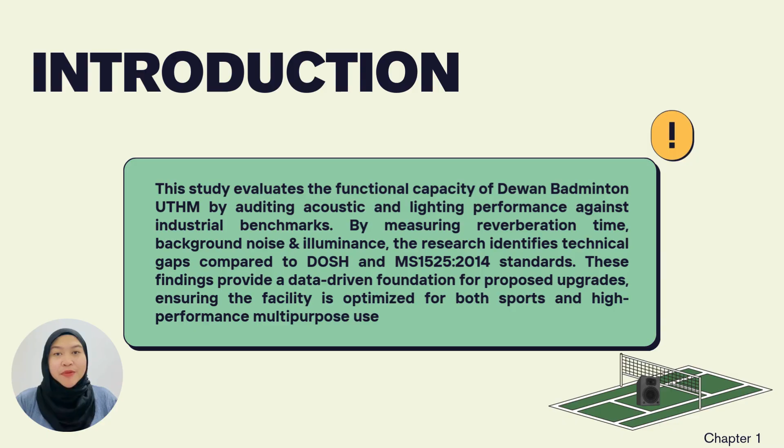We conducted the assessment at Dewan 1 Badminton UTHM. We audited the hall's functional capacity by measuring three key factors: reverberation time, background noise, and illuminance level. By comparing our data against DOSH and MS 1525 industrial standards, we identified critical gaps that limit the hall's versatility. Based on this measurement, we have proposed technical upgrades to improve sound clarity and visual comfort, transforming the space into a high-standard multipurpose venue.

The objective of this project is to measure the current acoustic performance, reverberation time, background noise, and lighting levels within Dewan 1 Badminton UTHM. Second is to assess the compliance of these measurements with established regulations, specifically the DOSH standard for noise and MS 1525-2014 for lighting. The third is to propose technical improvements and mitigation strategies based on the collected data to enhance the hall's suitability for multi-purpose use.

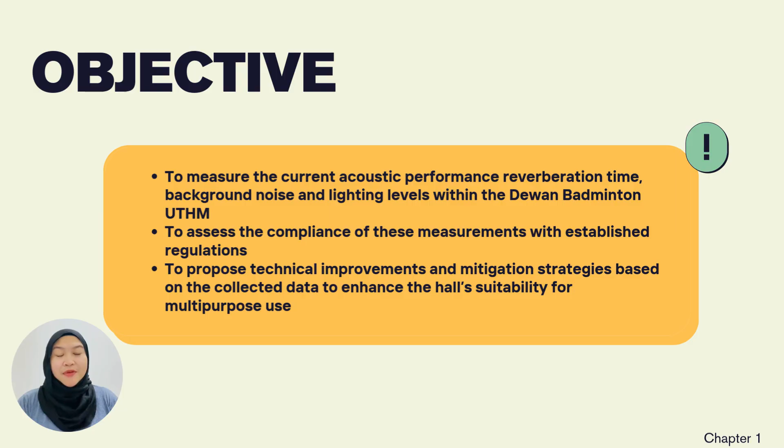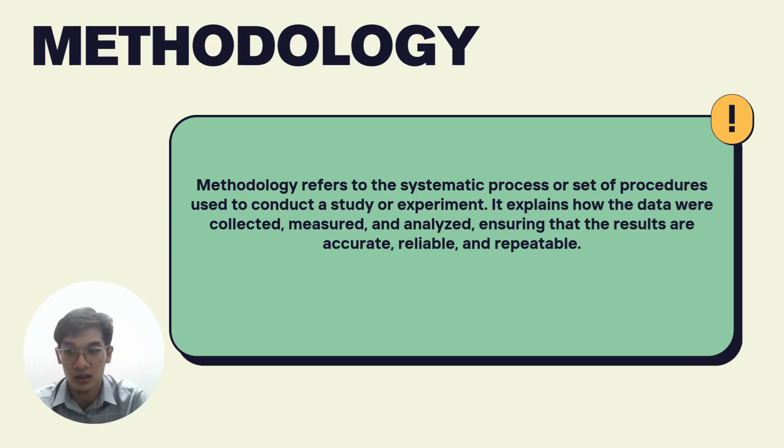Methodology refers to a systematic process where procedures are used to conduct a study or experiment. In this case, we measure reverberation time, background noise, and lighting.

For the reverberation time measurement, firstly, the sound source was placed at the selected location in the hall to ensure even sound distribution throughout the space. A total of 45 points were set up using a grid layout with 5 meter horizontal spacing and 2.4 meter vertical spacing to cover the entire hall.

At each point, the sound level meter microphone was mounted on a tripod at a height of 1.2 meters above the ground, representing the ear height of a seated occupant. To reduce the effect of direct sound, a minimum distance of 1.5 meters was maintained between the sound source and the microphone. All measurement points were also positioned at least 1 meter away from walls and reflective surfaces to minimize boundary reflection influence and ensure the decay measurement represents the room.

The measurement begins when the sound source generated broadband noise until a stable sound field was achieved inside the hall. Once the sound field became steady, the sound source was switched off, and the sound level meter then recorded the sound decay. The reverberation time was obtained by measuring the time taken for the sound level to decrease by 60 decibels, known as RT60.

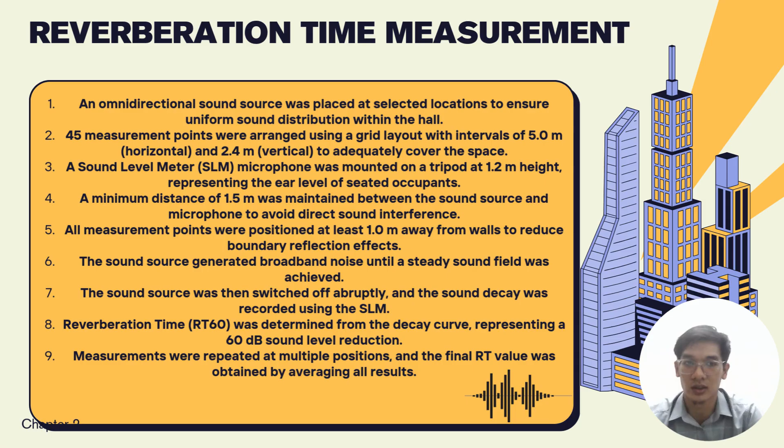To ensure a reliable result, measurements were repeated at different source and receiver positions. The final reverberation time for each frequency band was calculated by averaging all the measured values.

The second measurement is background noise measurement. Before the background noise measurement begins, all intentional sound sources, including the PA system and sports activities, were turned off to measure only the natural ambient source. The mechanical ventilation system, which consists of 9 industrial fans, remained operating to represent normal hall conditions.

The sound level meter was placed on a tripod at a height of 1.2 meters, same as the reverberation time measurement, at several locations in the hall.

Background noise was recorded over a fixed time period at each location and repeated at different times to account for noise fluctuation. The measured data were analyzed using octave band analysis and used to generate a noise rating curve, which was compared with standard criteria for multipurpose halls. To ensure reliability, measurements were taken at multiple locations, and the final background noise level was obtained by averaging all results.

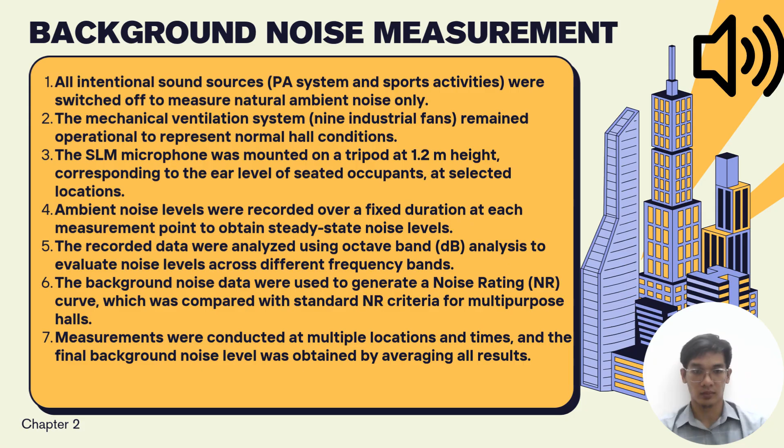For the lighting measurement, all measurements were conducted using a lux meter with a grid layout to ensure uniform coverage across the hall.

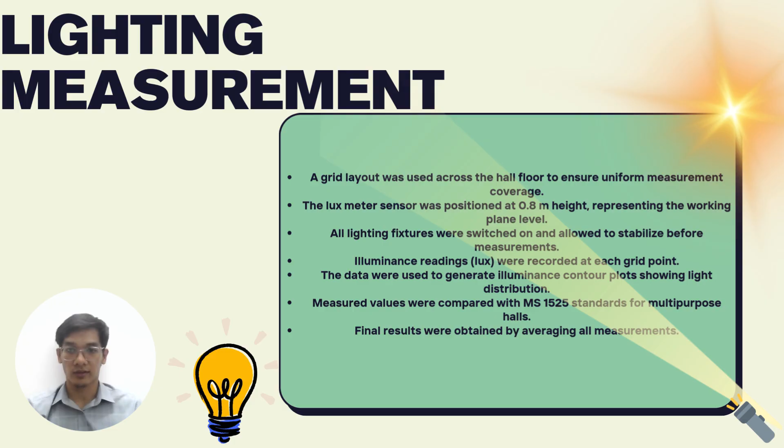The sensor of the lux meter was placed at 0.8 meter above the ground, representing a working plane height, and all the lighting fixtures were switched on and allowed to stabilize before readings were taken. The measured values were recorded at each grid point and used to generate illuminance contour plots to assess light distribution and uniformity. The results were compared with Malaysian standard MS1525, a standard for multipurpose halls, and the final illuminance level was obtained by averaging all measurements.

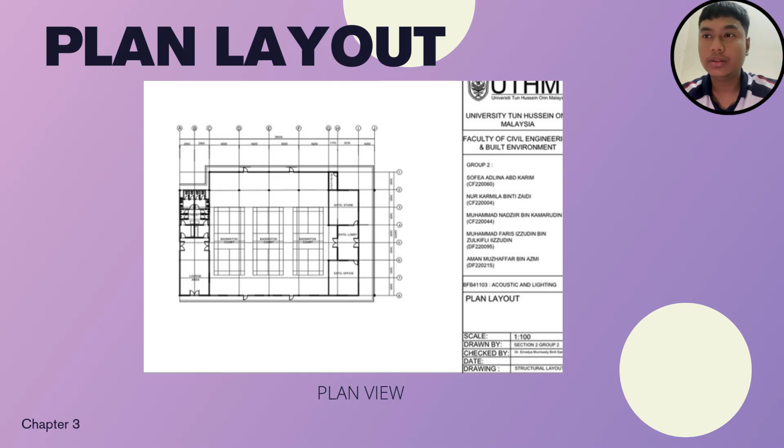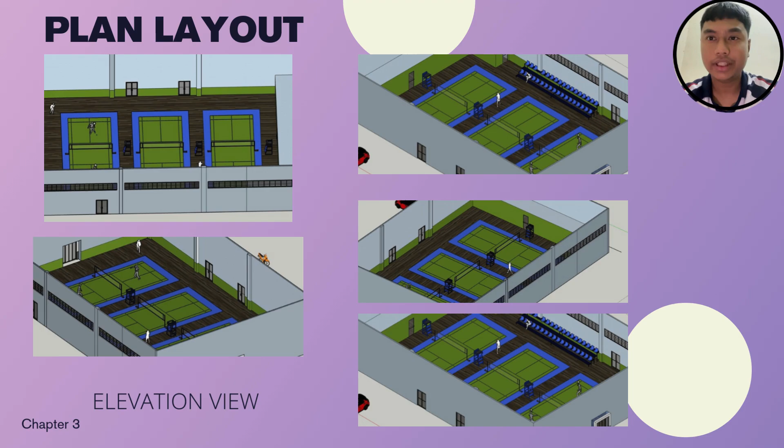As you can see, there are 5 elevations from the badminton hall located at UTHM.

This study evaluates the UTHM badminton hall acoustic performance by measuring reverberation time across 50 points. Our analysis showed that the hall's reverberation time is fairly critical. We recorded a peak of 144 at the lower frequency. According to international guidelines, the hall's 20 seconds of reverberation time is nearly 10 times the recommended limit.

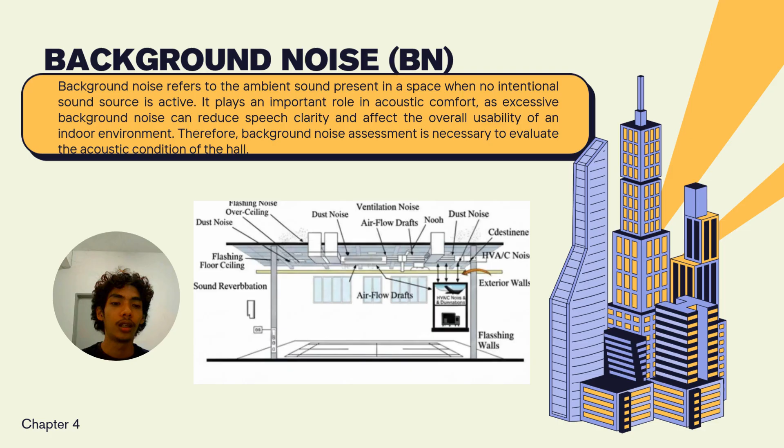Background noise refers to the ambient sound in a space when no intentional sound source is present. It is important because high background noise can reduce speech clarity and affect acoustic comfort. Therefore, background noise assessment is needed to understand the usability of the hall.

The overall average background noise recorded in the hall is 44.5 dB. The results show that noise levels are higher at low frequencies and gradually decrease as the frequency increases. This pattern is commonly found in large enclosed indoor spaces.

The measured background noise values were compared with the noise rating curves. Most of the values fall between NR30 and NR40, with low frequency noise being the dominant component. This indicates that the background noise level is generally acceptable for this type of space.

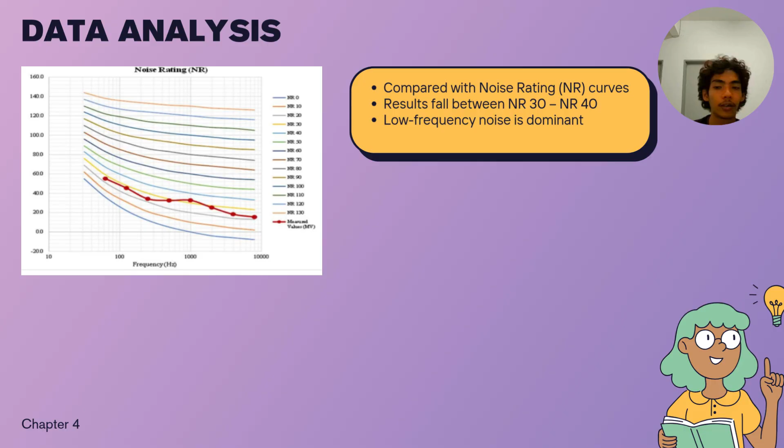In conclusion, Dewan Badminton UTHM has a moderate background noise level and is suitable for sports and multipurpose activities. However, additional low-frequency noise control may be required if the hall is intended for acoustically sensitive uses.

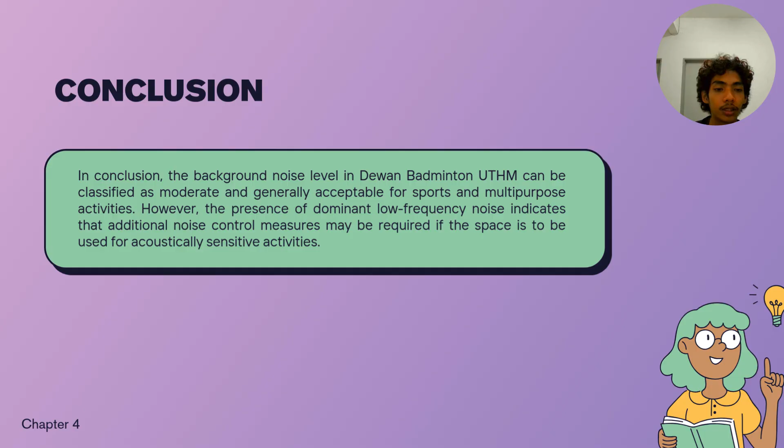So for the analysis of illuminance, an analysis of illuminance level at badminton hall UTHM was conducted to evaluate the adequacy and distribution of lighting within the facility. The results obtained are presented and discussed as follows.

First, for the area, the total area is 951.06 meter square. For the total luminous flux, 1,233,600 lumens. For illuminance level, lux equals total luminous flux per area. So the total lux is 1,297.08. The hall currently has a massive reverberation time, making speech unintelligible.

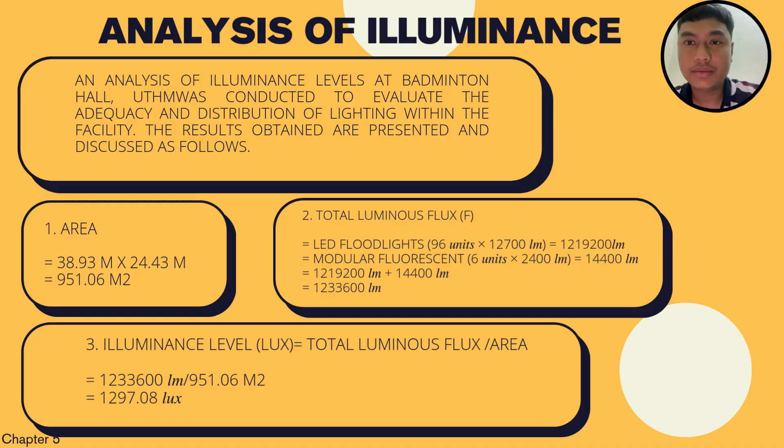To fix this, our lighting improvement plan starts by replacing the lighting. To modernize the hall, we are upgrading to high efficiency LED to achieve better performance for exams and high color quality for ceremonies.

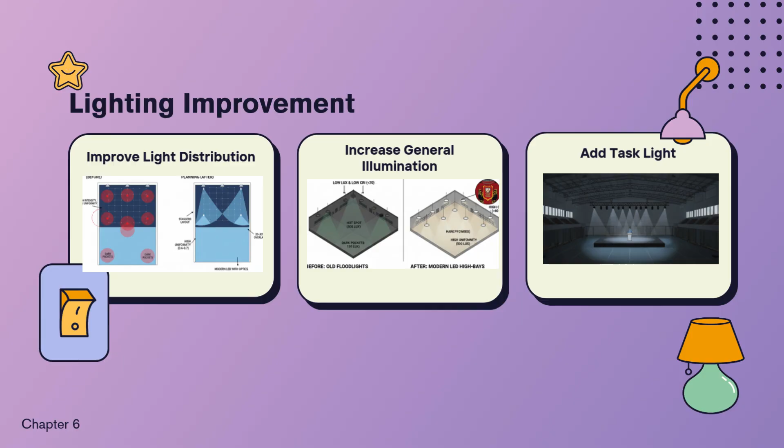In conclusion, the hall is acoustically live, with a reverberation time of 20 seconds, which is nearly 10 times the recommended limit. We also recorded a significant bass boom at 80 Hz, and lighting that, while bright, lacks the uniform distribution needed for formal events.

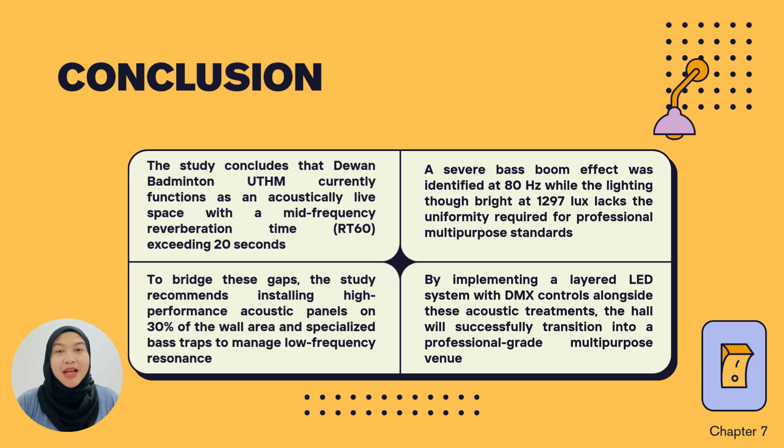To resolve this issue, we proposed a two-phase upgrade. First, installing acoustic panels and bass traps to fix sound clarity. Second, upgrading to a layered LED system with DMX controls to allow for adaptable lighting modes. This targeted, data-driven modification will transform the facility into a high-performance professional venue for the entire university community.